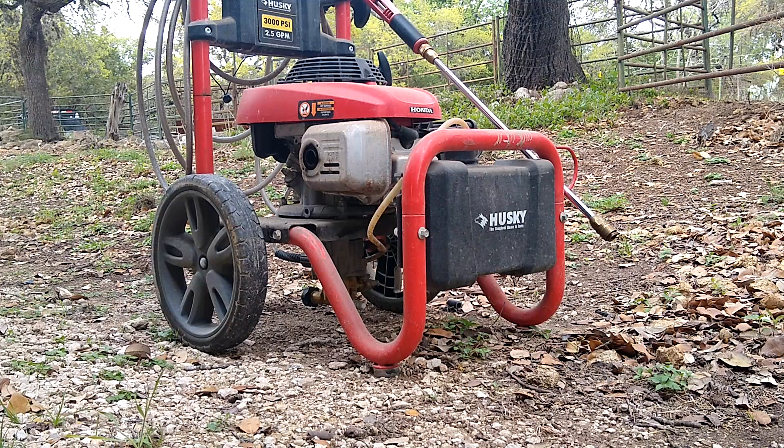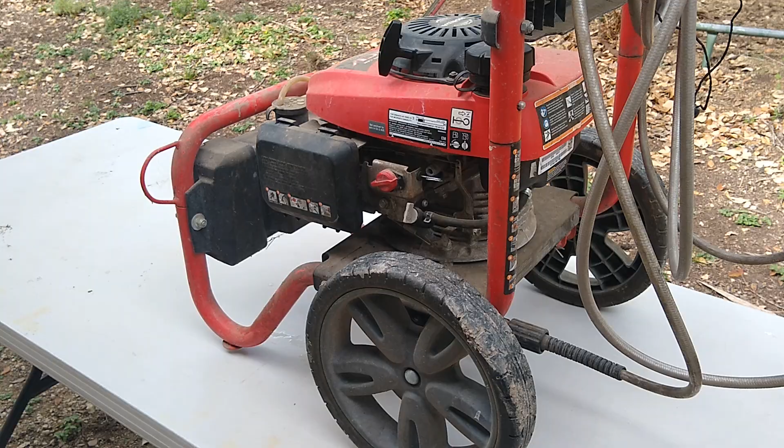So let me show you what's going on with it, and we'll see if we can't improve on the performance of it. Let's start by taking the air filter out, remove the little air box. Let's get the carburetor completely out of there. Probably have to start by just cleaning up the carburetor real good and just looking for issues. I can see already that it's dripping fuel, so that's not a good sign right off the bat.

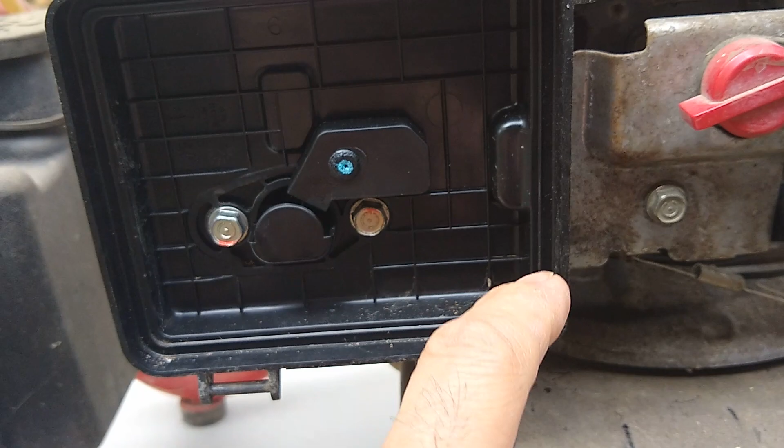So we got two 10mm bolts. Show you where they're at. Take these two off, and this air box will come out, and then we'll see what we got behind there. Another good idea would be to pinch off the fuel line.

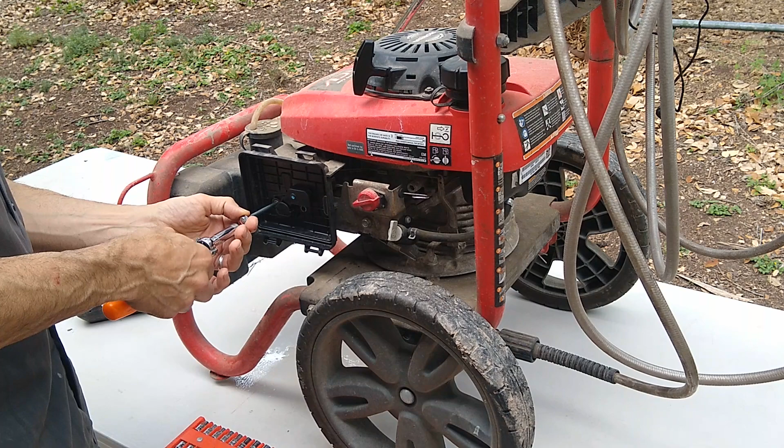Next thing we want to do is drain any fuel that's in the little carburetor. So under here there's a little reservoir, and you can see it's already dripping. So I'm going to go ahead and unscrew that, let all that fuel drain out of there. So guys, the little bolt on the bottom of the little reservoir is also 10mm.

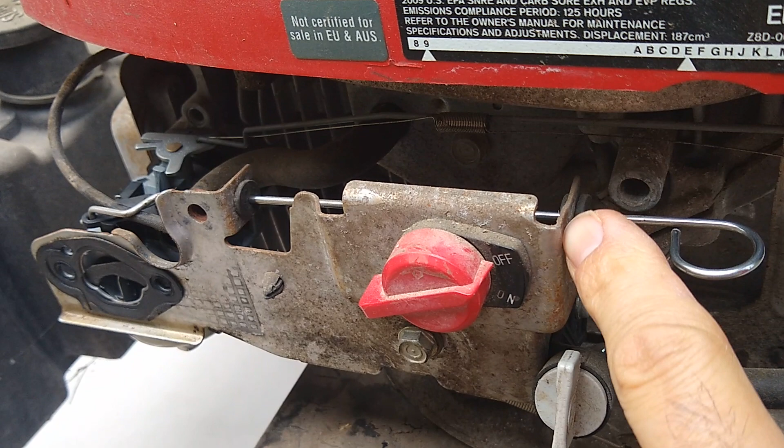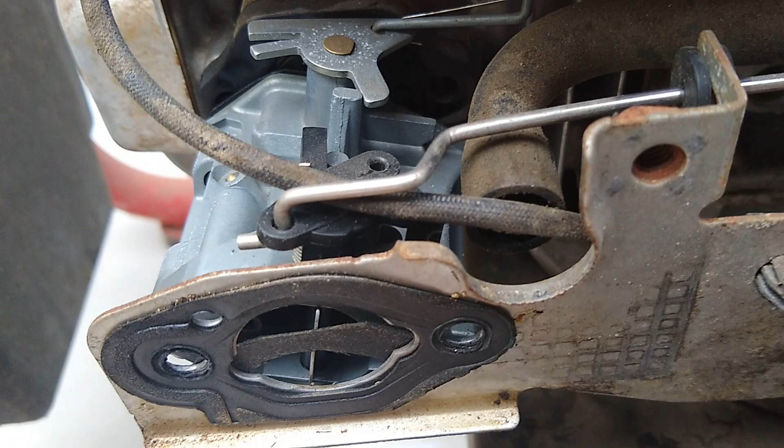So we gotta push this little rubber thing out to get this little thing loose. We gotta push this one also out. But anyway, you take out these little rubber things, and then this little shaft. We'll have to wiggle the carburetor out of it, and then I believe there is a fuel line down here. So right here we got a fuel line. So just get some pliers, open that up. Pull that hose off, and then we should be able to get this little part out of there.

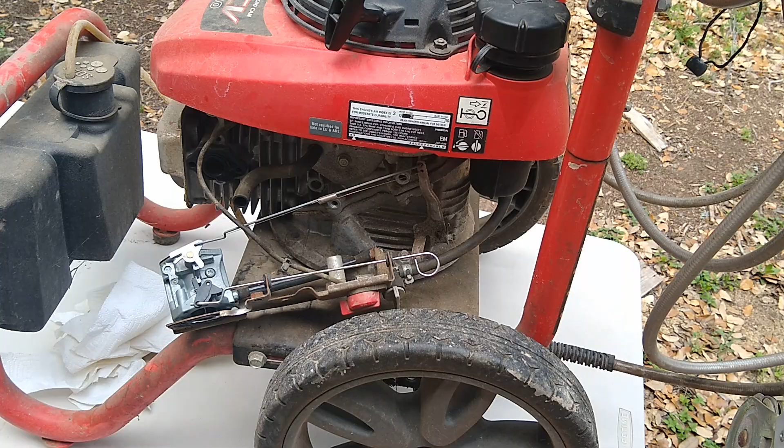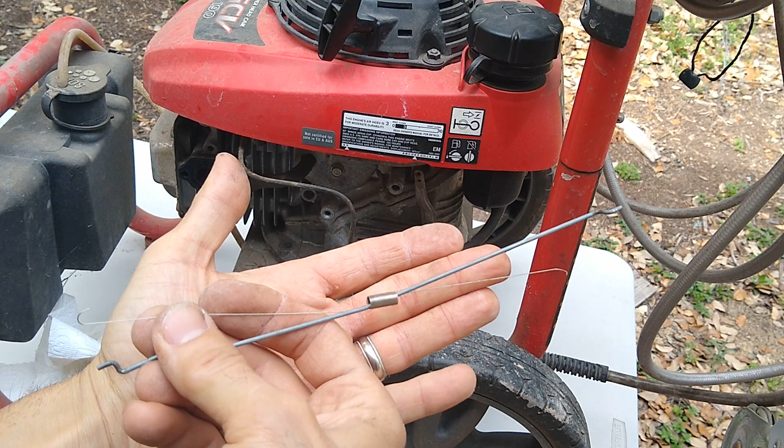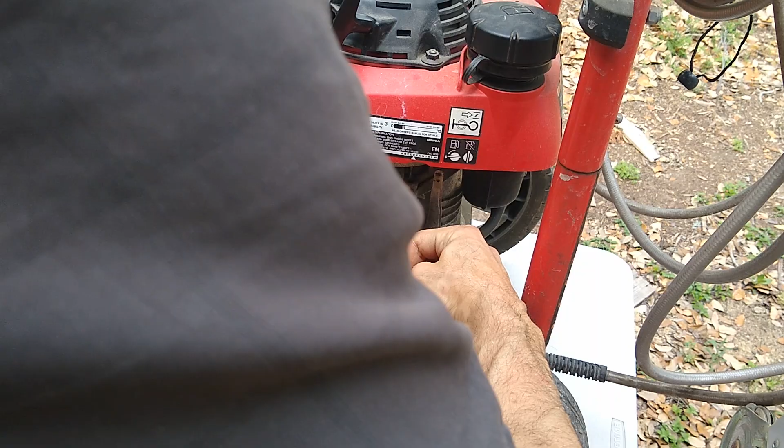I'm just going to take this whole plate off. Just carefully work this little metal bracket off of here. And then there's also a spring. This is what we got. So save this, bend this little end back a little bit. There it goes. Set this over here to the side. Work this part off. We're just going to need a pair of pliers.

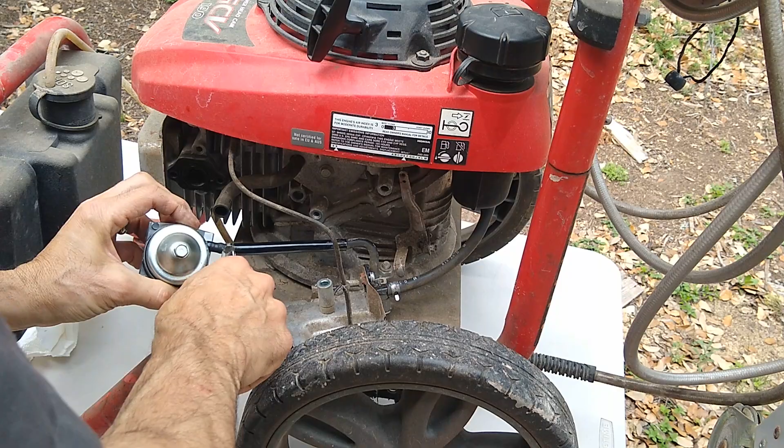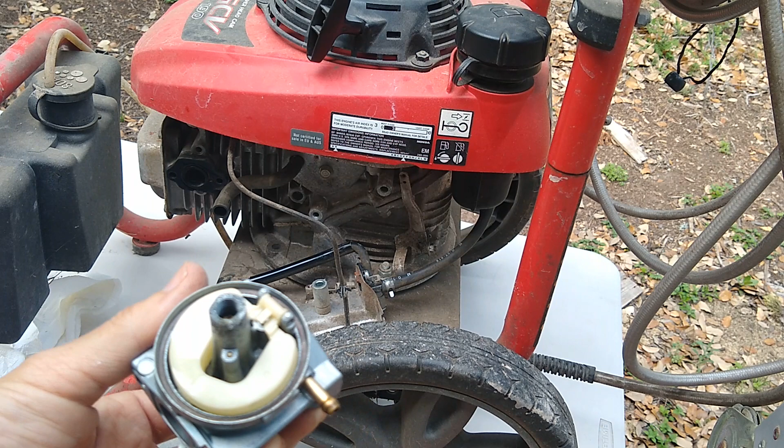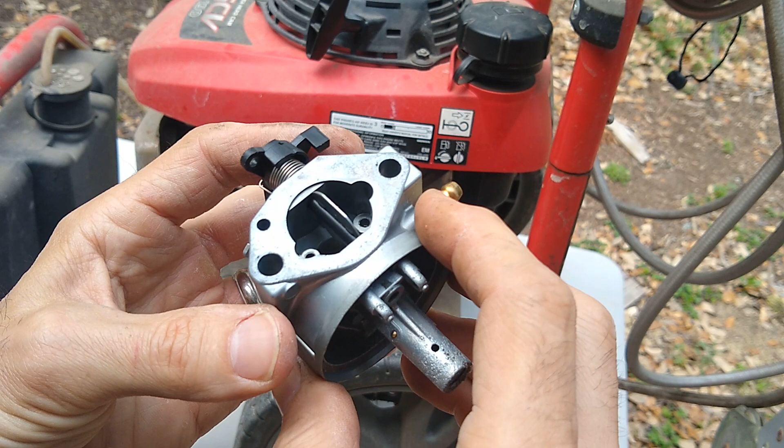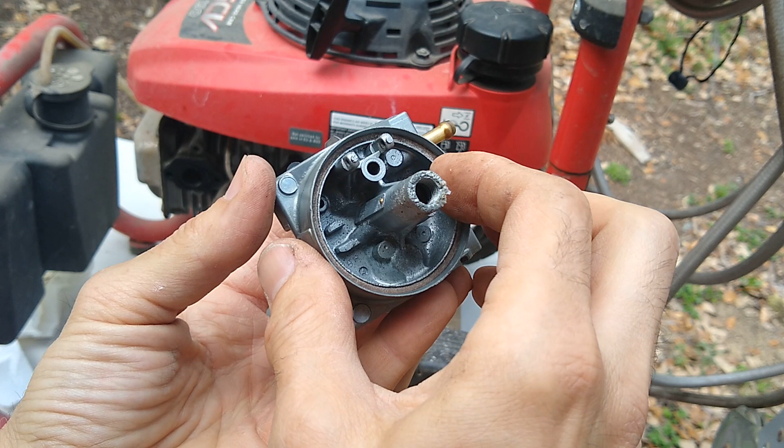So here's the little carburetor. And let's check the inside, see what it looks like. What I think the issue is here, guys, is that it doesn't have a gasket here. There's supposed to be a gasket right in that groove, and there's no gasket. So that's the reason that this thing is leaking fuel all over the place. So in here, there's supposed to be either a little rubber gasket or an O-ring or something. Anyhow, let me go ahead and put this in the vapor blast cabinet. We'll clean it up real good, and then we'll make up some gaskets for it.

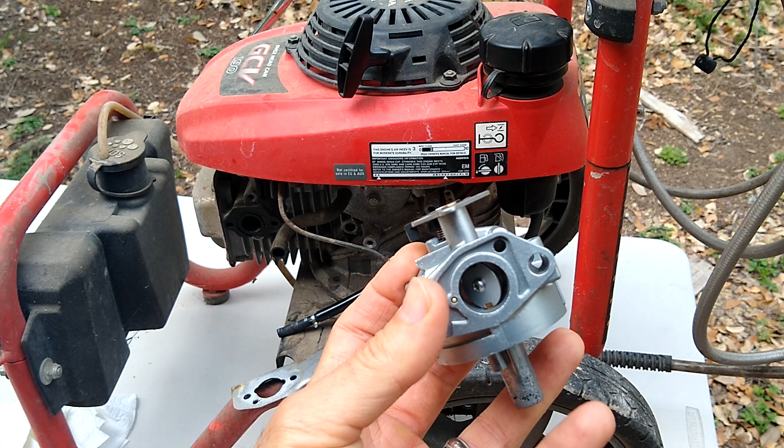Okay, this is how it turned out. So you can see we gave it a nice little refresher. Looks a lot better than it did. And one thing that's very important whenever you're using any kind of a blast media is you want to blow out all of these little passages in here. So you want to get your compressed air, and make sure that we blow out all of these little orifices. So you just put it in here. Inside of here, these little holes here, just blow them out. There's another one. Make sure you blow this part out here too.

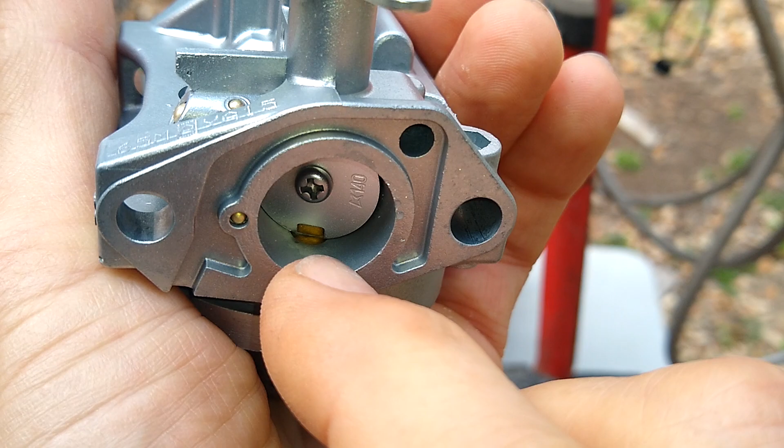Another thing very important that we need to do is lubricate all of these moving parts, since we did introduce a bunch of water. So I'm just going to put a little bit of some lubricant in there. Lubricate this little deal here. So I'm going to put some lubricant down in this hole. See if we can turn on the lights so you guys can see a little better. So I'm going to put a little lubricant down in this hole here. Lubricate the top part, right where this little thing pivots.

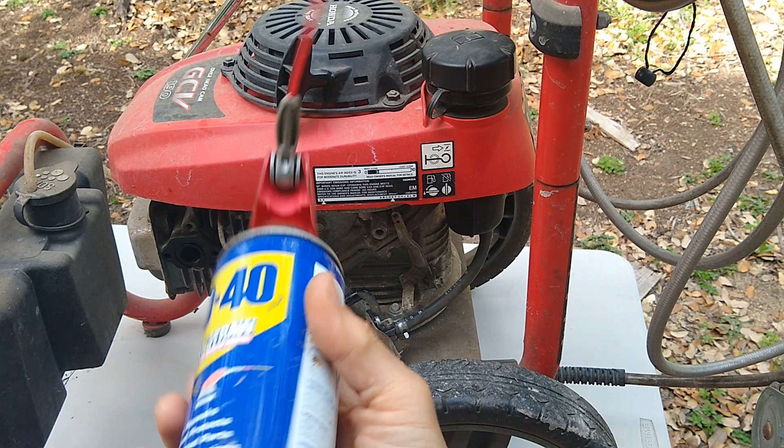Lubricate in here. Lubricate this shaft. Also lubricate up at the top, the shaft where it enters this little carburetor, and then at the bottom as well. What we're going to use to lubricate is just a little WD-40. That's it. That should do it. And just work these a little bit. Make sure they move real nice. Alright, that looks good.

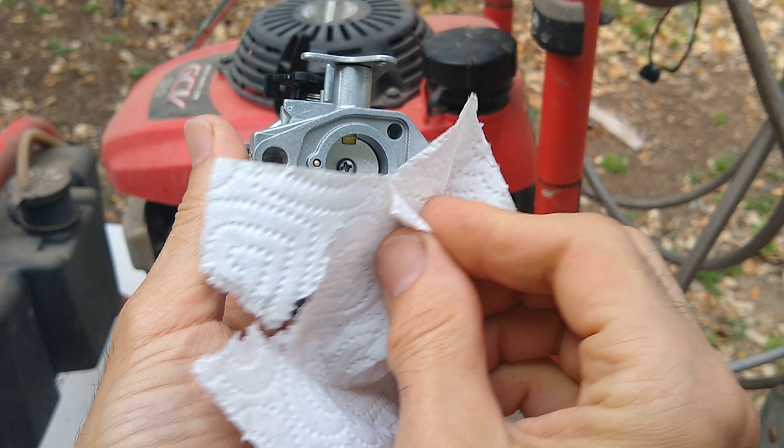Clean off any extra oil that might have sprayed out there. Alright, next up we're going to address the gaskets. So let me see if we can recover any of the gaskets that were on here. And if we need to make some new ones, we'll make some new ones.

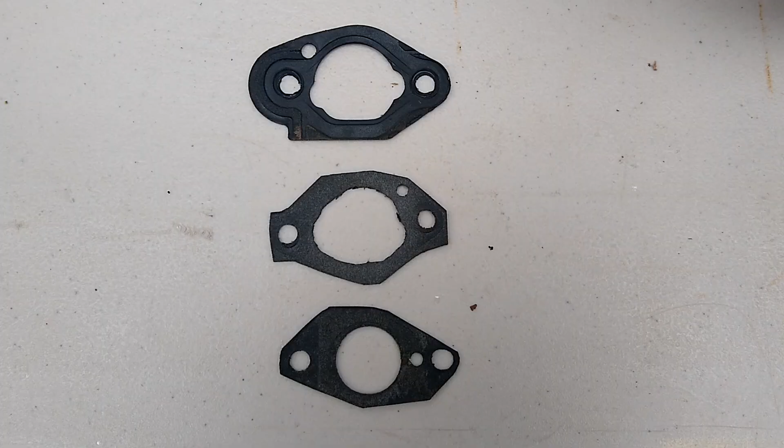These are the gaskets that we're going to need to find. And I can tell that this one definitely is not right. This one still looks good, and it does contain some metal. If you look real carefully along the edges, you can see some metal there. So this one will be reused.

This one will need to be replaced, and I'm going to have to check on this one to see if this one looks the way the original one does. I can tell you just by looking at these two that they're not the original ones. Let's see if we can do some search on the internet for the same model engine, and hopefully someone will provide a picture that we can use as a reference.

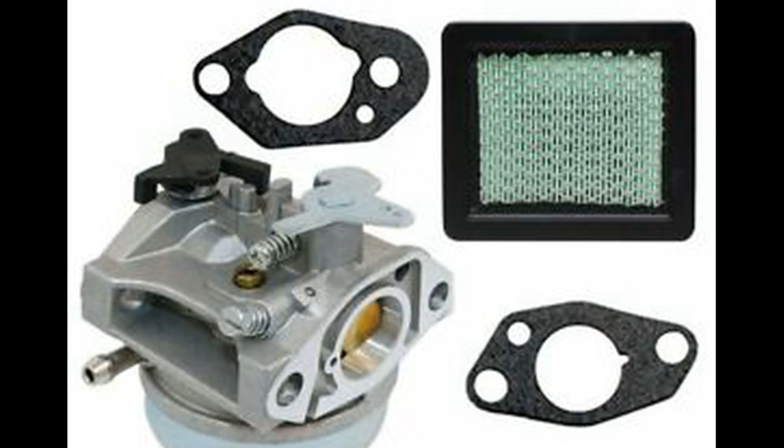I opened up a Google browser and just typed in GCV160 Carburetor and came across this picture. It's the same exact model and carburetor as the one we're using. These are the two gaskets that we're going to need to reproduce. They're going to look just like the ones in this picture when we're through.

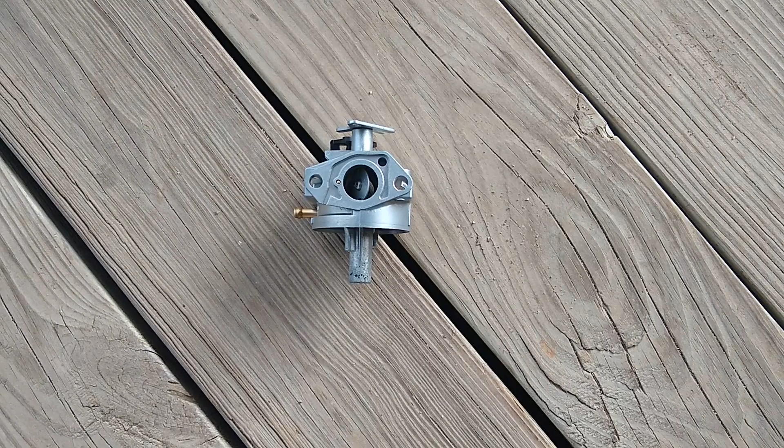The next thing we want to do is we need to recreate the gaskets if we don't have an accurate original one. The best way to do this is to photograph the part that you need to create a gasket for. In this case, this side of the carburetor along with the other side of the carburetor. So I'm going to take a picture of this side, then I'm going to turn it over, take a picture of the other side, then we'll head over to the computer and try to recreate those gaskets.

Next up, we're going to open up GIMP. Maximize it, and then we're going to open the images that we downloaded. So these are the ones that we took with our camera.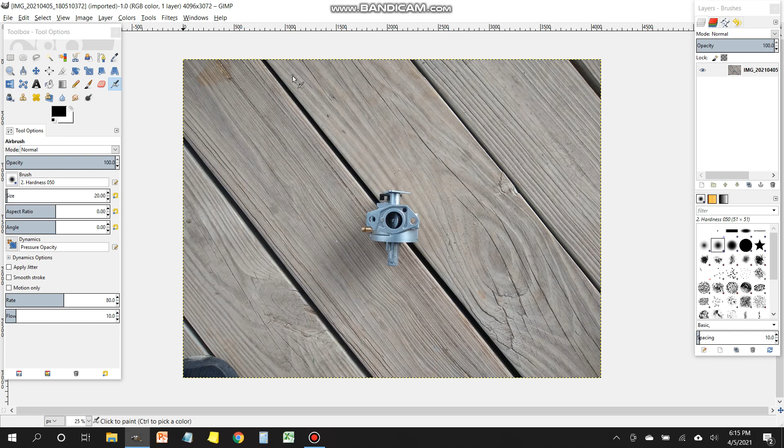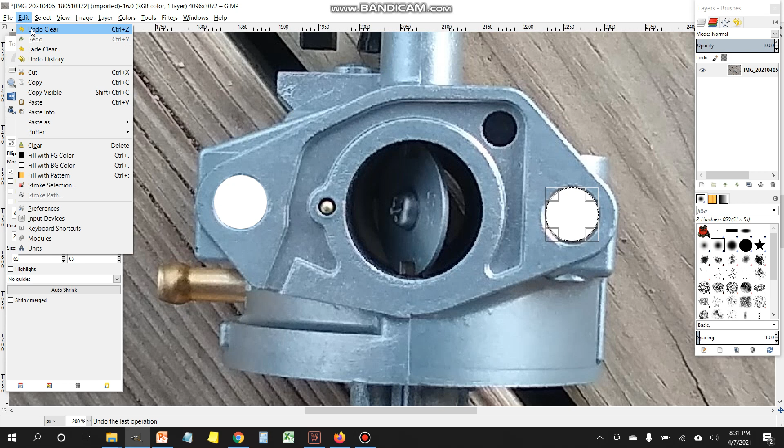Now once we're in here, what we're going to do is we're going to draw a circle, and we want to make sure the circle is the same size. Then we're going to position it properly. Once we got it where we need it, then we're going to press delete. It's going to delete what's within the circle. We're going to move the circle over to the next bolt hole, not changing the size because the bolts are going to be the same.

Go ahead and delete. Then we're going to take that circle, move it over to the carburetor side, enlarge it, position it, delete. Then we're going to go over to this little breather valve, same thing, position it, delete, make a little square, position it, delete.

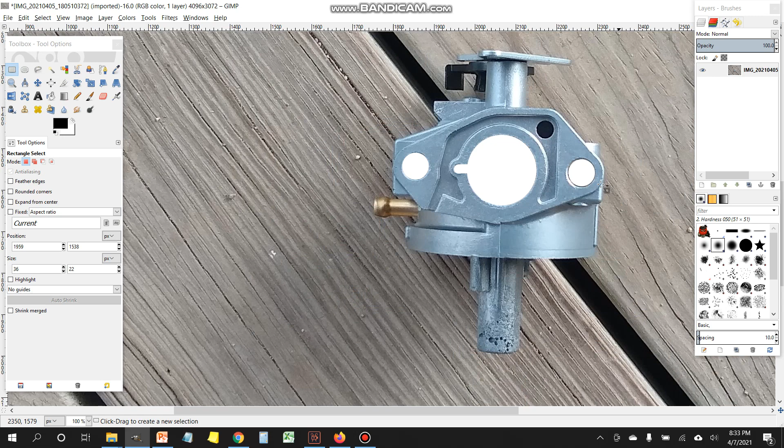And now we're going to create a border around this whole entire carburetor. So we're going to go around the side that's going to get the gasket. This takes a few minutes. I have it sped up just to make it faster. Once we got it selected, we're going to invert our selection and delete. That gets rid of our background. We're going to select the item, copy, paste as a new picture.

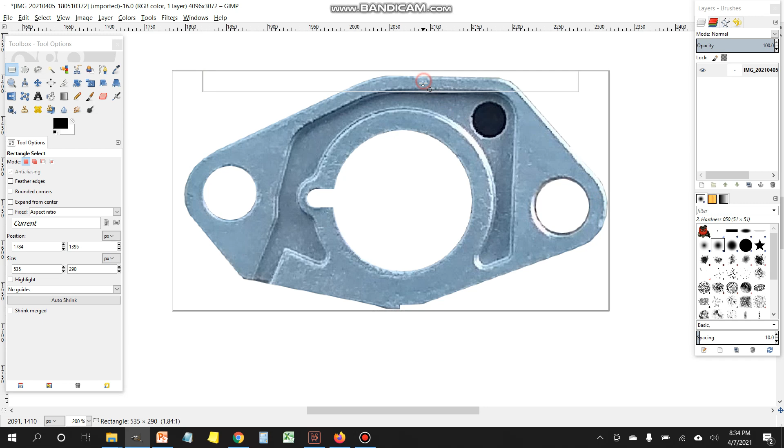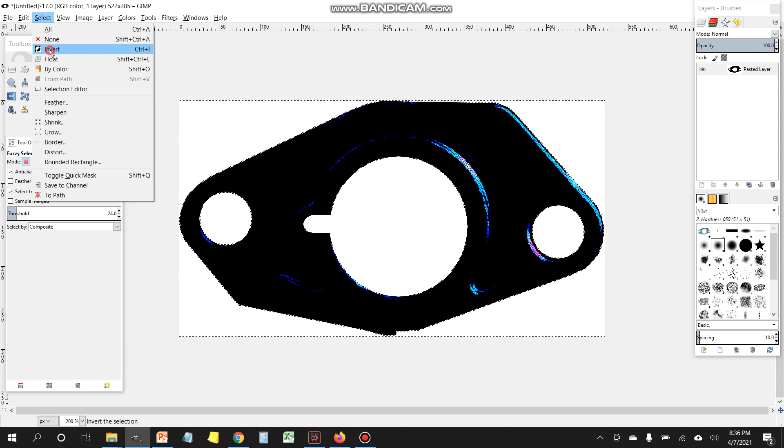Zoom in. Now we're going to go to the level adjustment, and we're going to make it all dark. So the idea here is to get rid of the color variances, the shadows and stuff. Select all of your white points, invert your selection, and then pick the paint tool and paint everything black. That way our gasket is nice and even.

We're going to do the same thing with the other one. So we're going to export this one. We're going to call it gasket 1. Save it. Next up, same thing. So create a circle, make sure the size is the same, position it, delete, move it over to the next bolt hole, position it, delete.

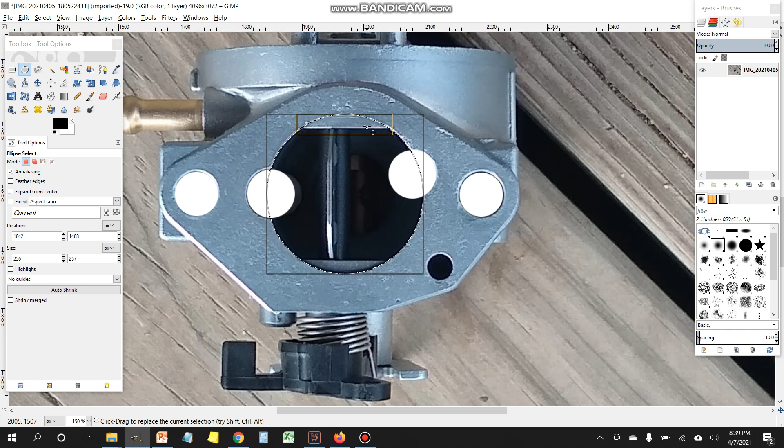Same thing, bring it over to this gap that we need to make here near the carburetor. Then do the same thing for the carburetor, enlarge it, position it just right, delete. And then we got this last little breather hole over here. Alright, done. Now we're going to follow the same process as before.

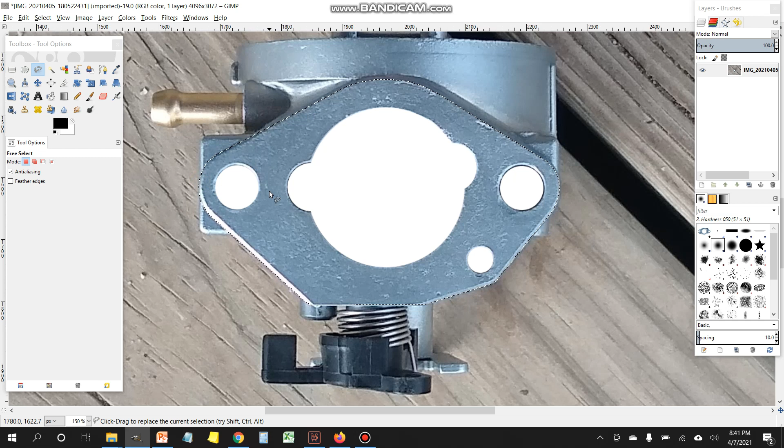We're going to go around and using the lasso tool, create an outline of the gasket we're going to create. Once it's all selected, select, invert, delete, and then we're going to go back over to create a box around it, copy, then paste as a new image, change the levels back to dark. Select all the white again, invert your selection, pick the paintbrush, paint everything black.

I'm going to export this one, gasket 2, and then head over to Cricut Design Space. These Cricut machines are fantastic.

Okay, we're going to browse for our picture. There's gasket 1. We're going to pick simple. Continue. Then we're going to change the tolerance on our magic wand tool to 70. That way we get a nice tight edge all the way around everything. Click on everything that's white. Continue. We're going to cut image. Continue.

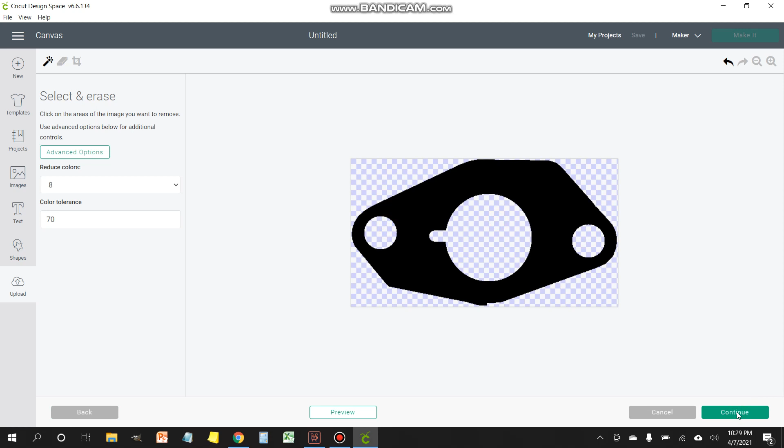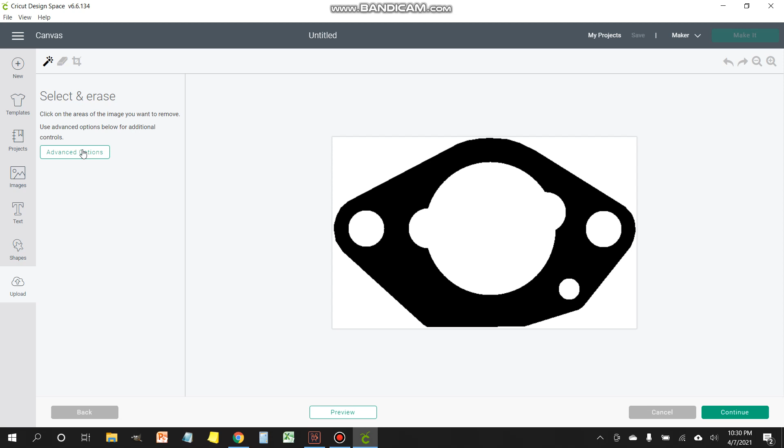And then we're going to do the same thing with the other picture. So we're going to open gasket number 2 and go through the same process. Again, simple. Continue. Change our tolerances back to 70. And then select everything that's white. Continue. We're going to pick cut image, upload, and now we got our images.

I've already created the project, but I'm going to show you guys how to load them in here. So you're going to go down to the bottom where it says upload, and you're going to select the gaskets. These are the ones that we just made. Insert images, and then what we're going to need to do next is to resize these.

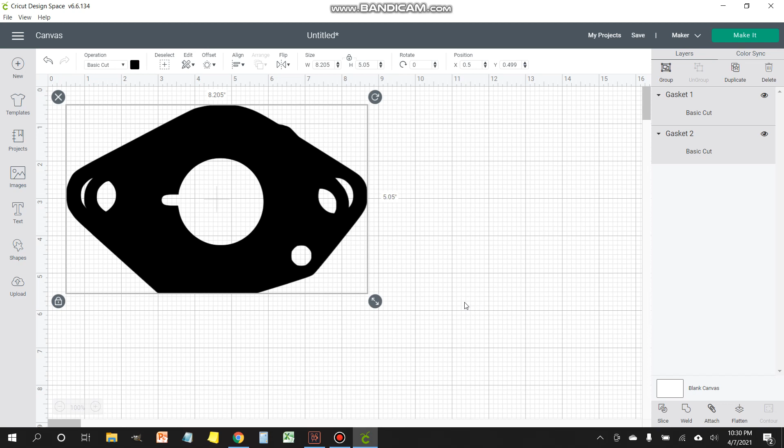So you're going to need to measure the width of the carburetor, and then we're going to adjust the size of these to match that width. You don't want to unlock the aspect ratio or anything, just make it the same width, and then everything should line up. So these I already did, and this bottom one was a mistake. I'm going to get rid of it.

And then I created already the little circles to act as the fuel bowl gaskets. I'm going to show you how I made those. All you got to do is create a circle. So we're going to go to our shapes. Down at the bottom, pick circle. Bring our circle over, and we measured the bowl. We know it's 2 inches, so we're going to go ahead and change this to 2 inches. Then we're going to change the color to some other color, maybe brown.

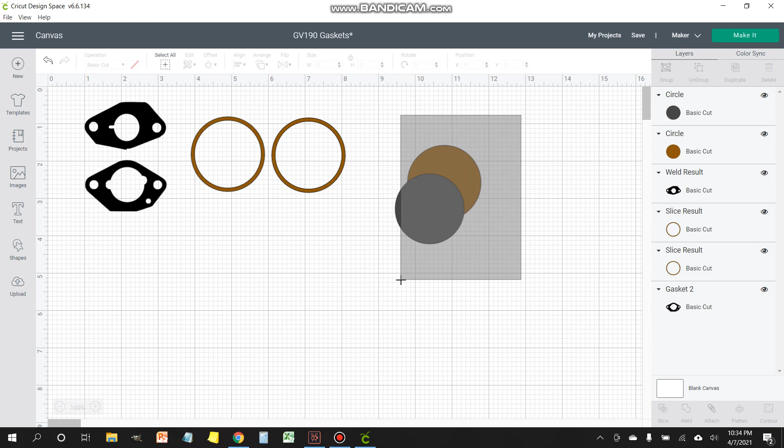All right, now we're going to create a second circle. This one has to be smaller than the 2-inch circle, so we'll make this one, I don't know, 1.875. I can't remember exactly the dimension because we already made it, but this is just an example to show you how to do it. And then we're going to select them both. We're going to align them. Select center, and it's going to put one right over the other.

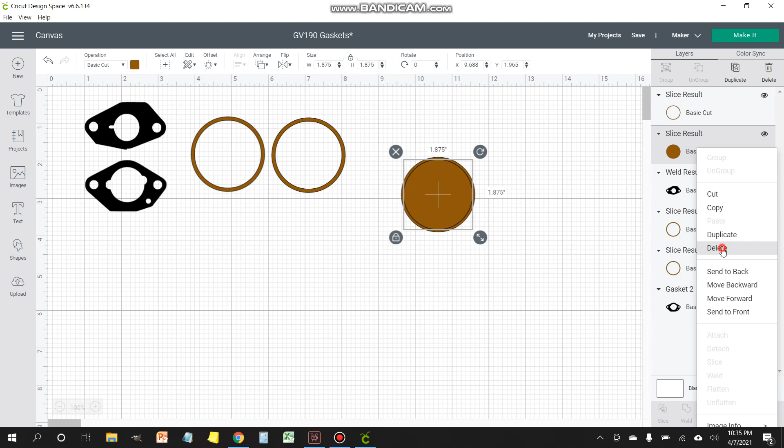Next, we're going to highlight and pick them both. Head down to the bottom where it says slice. And then if you notice on the top right, now we got several images. We're going to get rid of the black one. So just pick it, delete, and get rid of the brown one, delete. And what we're left with is the ring. So if you need two, you would just copy and then paste a second ring. I already got them made, so I'm just going to get rid of this one. And then next up would be just to click on Make It.

Now once it loads up, I've already made it, but the material that I chose for this is cereal box. It's going to use a deep point blade. Once you load that blade up in the machine, put your cardboard on the mat. All right, it's ready to go. Let's just let it do its thing.

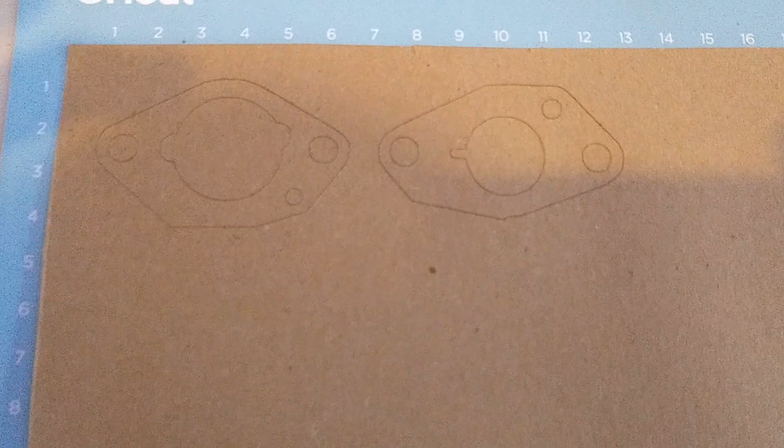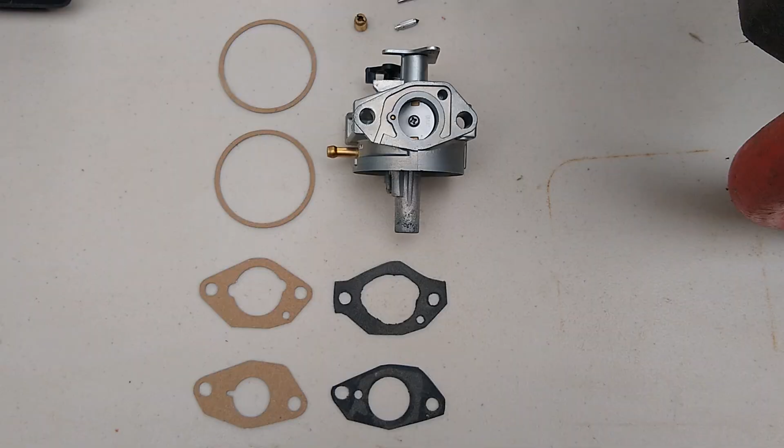So here we got our two gaskets, perfectly cut out. Let me go ahead and unload them from the sheet. Thankfully, there were a few websites that had some pictures of the gaskets, and using those pictures as a guide, we were able to recreate the original gasket. And as you can see, this is the gasket that was on the unit, and it wasn't working properly, and this is what the gasket is supposed to look like.

So again, same thing here. This is what was on the unit. This is what the gasket is supposed to look like. And then these two, I'm not sure if this part's going to work. I went ahead and had these also cut out on the machine, but I'm not sure if they're going to work. The original gasket was a piece of rubber, but we're going to go ahead and try to double stack these rings on here and see if we can't at least get it working.

So here we are with the carburetor, and I want to show you guys how good these homemade gaskets came out. So this is what it's supposed to look like, all right? And then on the other side, there's the gasket for the other side. So a lot better than what was on there. Let's go ahead and start reassembling this and see if we can't get this thing to work.

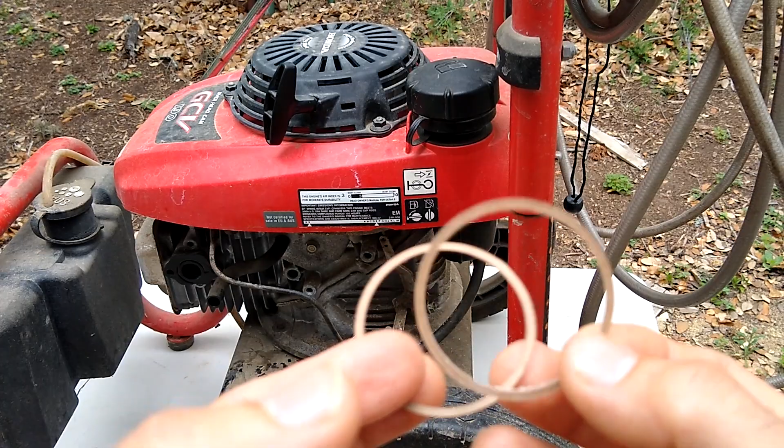Oh, and I want to show you how these gaskets on the bottom came out too. These are pretty cool. So we have here two rings cut out, and what I'm hoping is that they'll provide a good enough seal to be able to reassemble the little fuel bowl at the bottom.

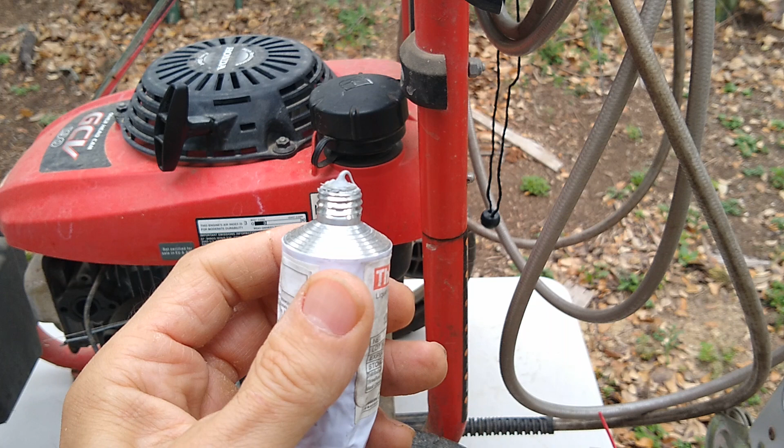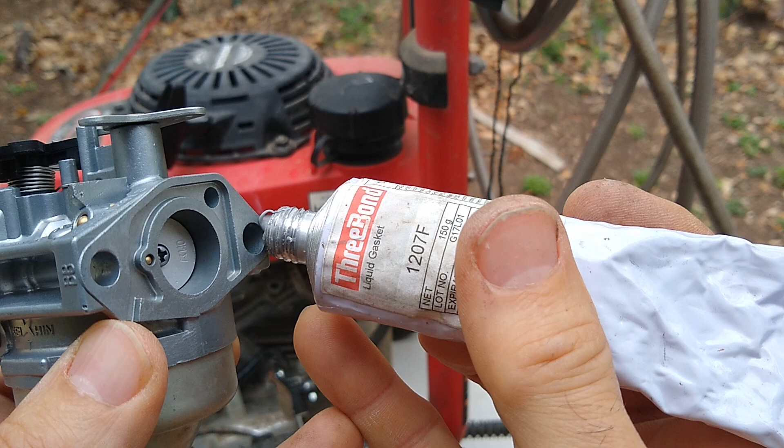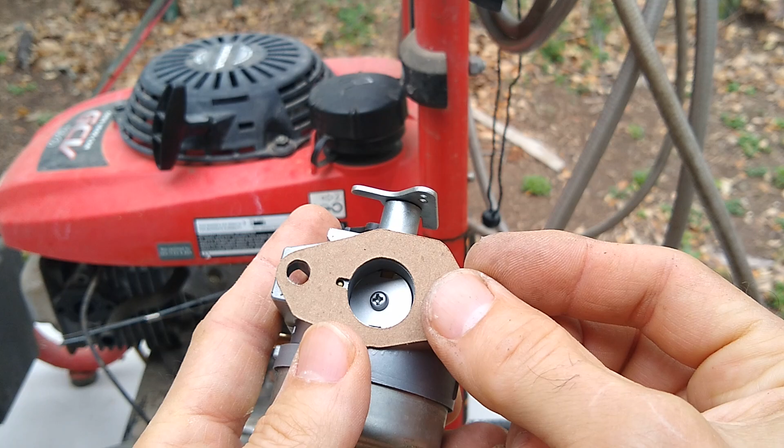All right, what I'm going to use is a little dab of some RTV sealant. I'm just going to put a little dab here on each end, and that should hold our gasket on. So just give it a little dot here, a little dot over here. Now I'm gonna put this on here, and then I'm gonna let it set up. That way it's glued on there and I don't have to worry about it moving around. Just press it down there.

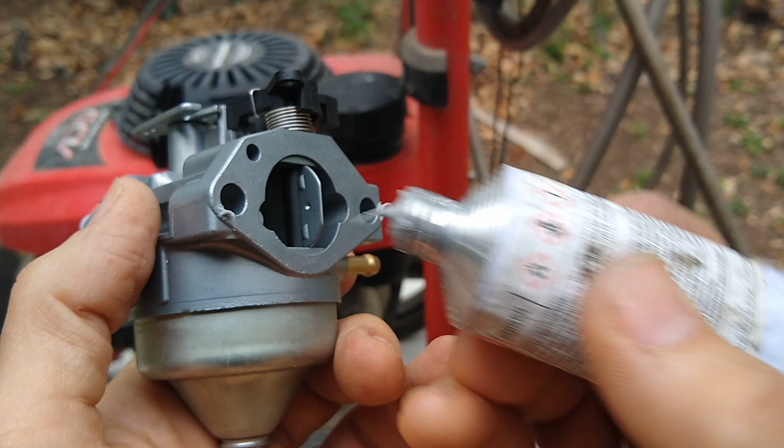And I'm going to do the same thing with the other side. Just give it a little dot over here on the edge. A little dot over here on the edge. That should do it. Make sure it's straight. And I'm just going to set this aside and leave it alone until this sets up. And then it should be much easier to reinstall.

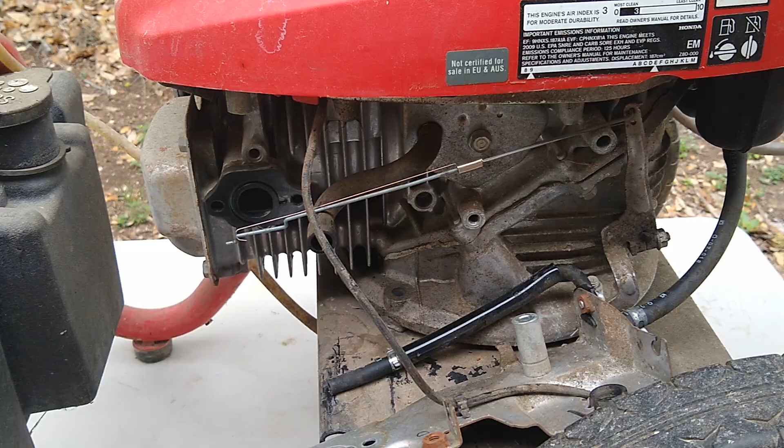We're going to start the reassembly with connecting this little control bar here and the spring. So go ahead and put this little guy back in place. Put the little spring in the little hole. And then now we're going to connect the carburetor.

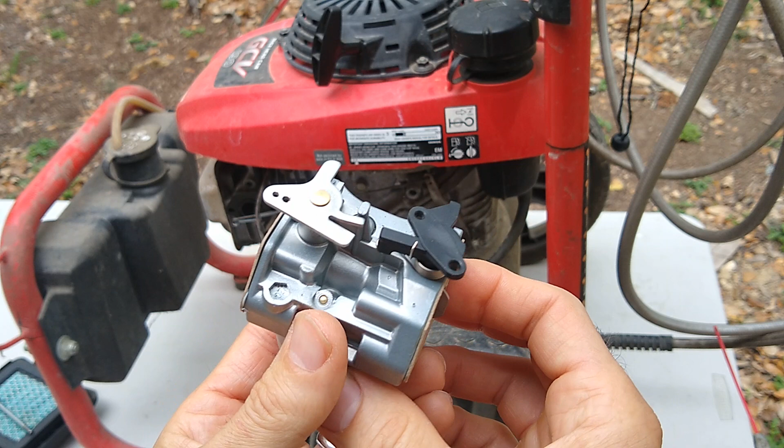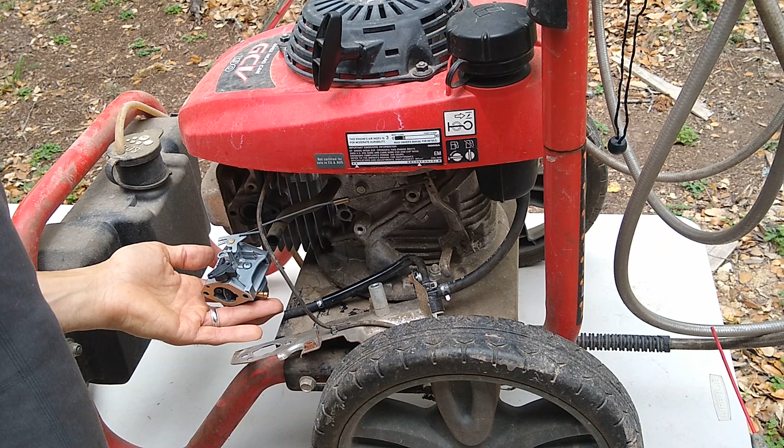It's been a little while. Our gaskets are now held in place. We're going to start by connecting that first bar that I just showed you to this little hole. And then the spring goes on the one on top. So let's do that. Next thing you want to do is connect up this bar here.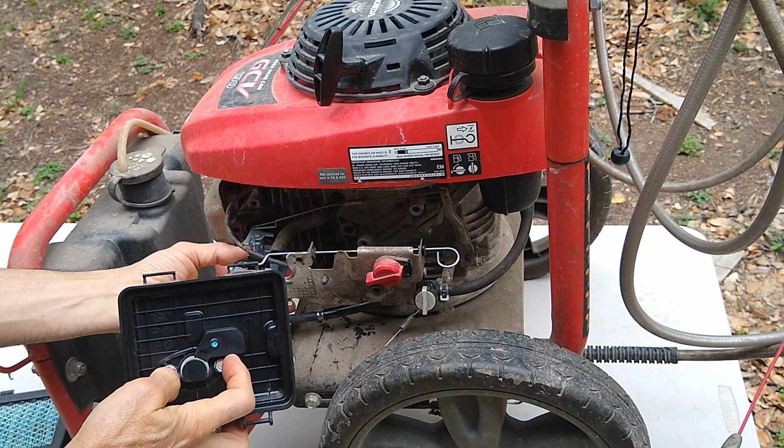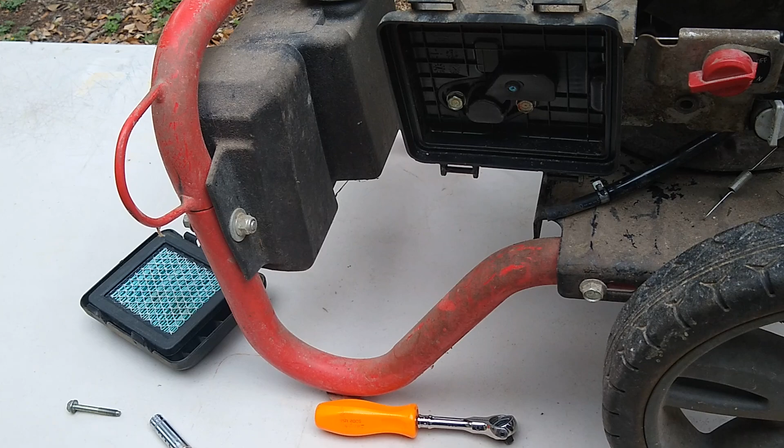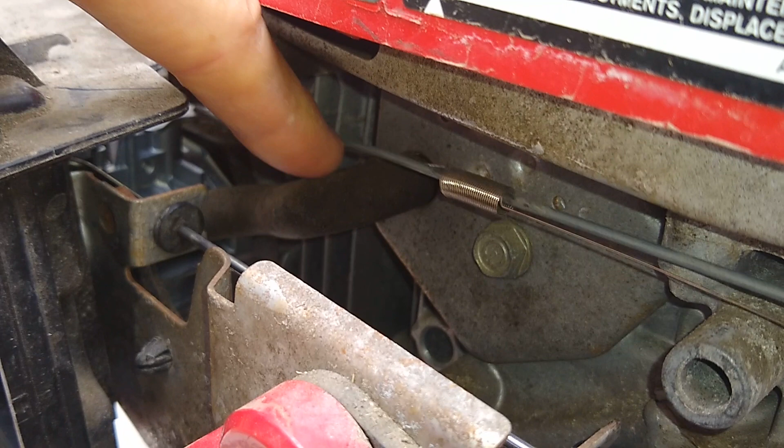Get your 2 bolts on the air box. So you want to have the 2 bolts on the air box. And we're going to sandwich it all together right now. Once you get the bolt started, make sure that we hook up the little hose that's behind here. Let me show you where that's at. We got to make sure that we reconnect this. Let's see if you can see it here, guys. There's a hose right here. We got to reconnect that to the air box, which is right there.

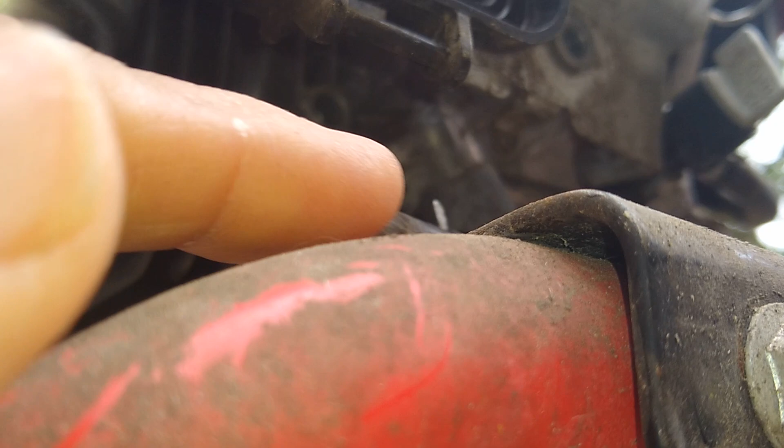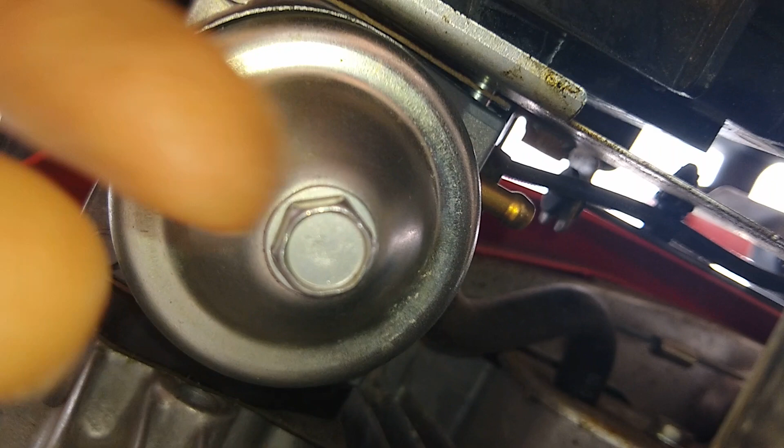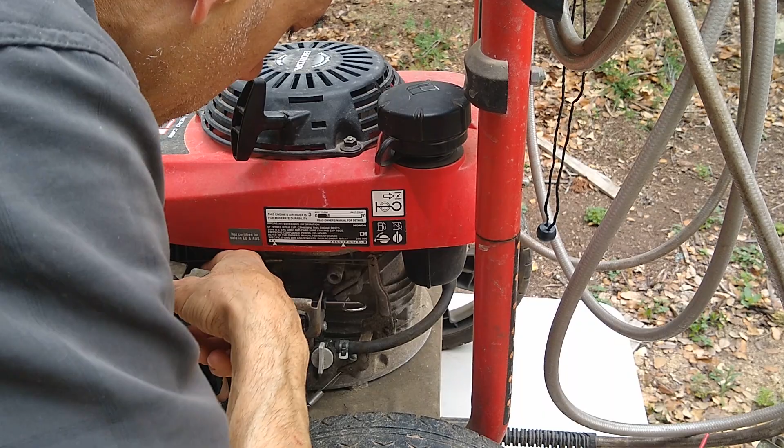And then on the bottom, we're going to need to reconnect this fuel hose to, let's see if I can get under there so you guys can see. So we're going to connect that fuel hose to this little nipple right here. Hopefully you guys can see that. Put this bolt over here for the bracket.

We're just going to tighten everything back up. And you don't want to crank down on this too much, but just snug it up. Make sure that you put your little clip back on that pinches the fuel line to that little nipple that comes out of the carburetor. Last thing is to put on the air filter. Alright guys, let's give it a try.